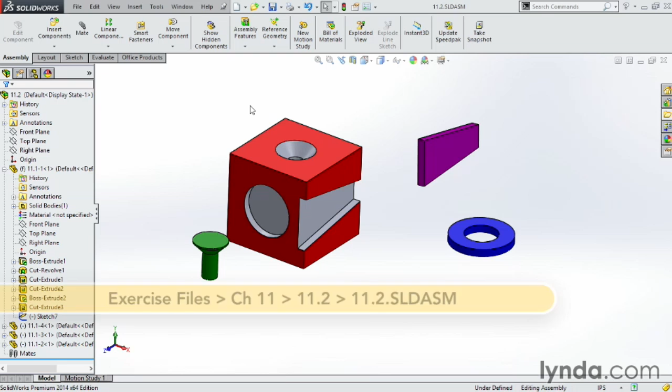In this video, we're going to cover the steps required to assemble parts together. The first step is to make sure we have all the required parts in the assembly. You don't need to bring all the parts in at once, however, sometimes it is handy to have them all available. Secondly, aligning the parts close to their desired location will help connect the parts later when we start getting into mates.

At first, let's take a look at all these components here and make sure we have everything we need. If you don't have all the components in the assembly at this point in time, you can always go back and add them in.

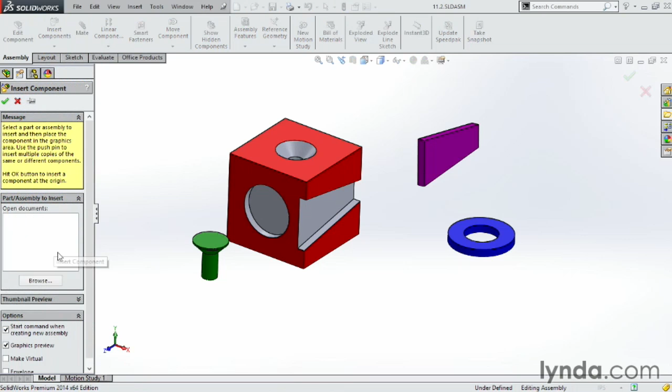You can come up here to Insert Component, and you can say Insert Component here, and any available parts that happen to be open in your file system will be listed here, or you can go ahead and click on Browse and import any other files you might want to have in the design.

In this case here, I'll click on the first part, click Open. You can see here it is attached to my tooltip. If I wanted to place another one of these same parts in the assembly, you can have as many of the same existing part in your assembly as you'd like.

When you're happy with that, click OK, and it's just going to place it in the assembly. It's a quick way to add new components.

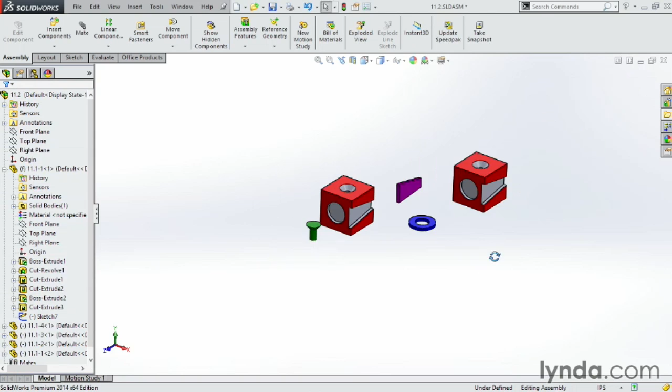Then what I'd like to do is line everything up so that I can easily see how to put these components together. So in this case here, I'm going to drag this over to here, but notice I'm dragging it kind of in 3D. So if I spin it around in 3D, you can see it's actually quite a bit higher.

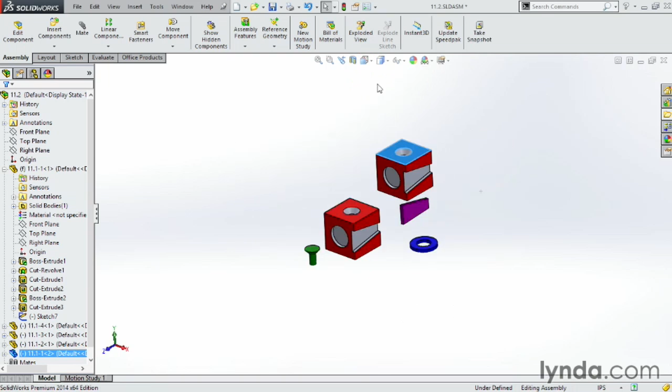Sometimes it's handy to actually look at this in a different view mode. You might want to look at the top of the parts and maybe align them like this first, and then maybe switch over to a different type of view that looks at the side and brings these down. This quickly allows you to move things around in the correct orientation.

Next, you can see I have this component here, and I like to have that kind of close to this slot over here. So let's put it over here. And this little green pin looking thing, let's put that up above.

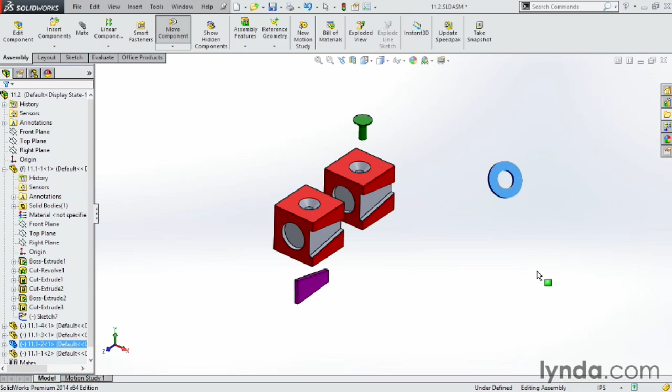And we have this little washer here. Let's spin that around holding down the middle mouse button to get it kind of close to the right orientation. It doesn't have to be perfect.

And then I'm going to bring that around, and I'm going to place that close to the end of where this other pin is. Now we've got things that are fairly close, but again, might want to move these around a couple times to get them a little bit closer.

That's the key to getting and building assemblies correctly the first time: getting the components in there, knowing what they are, what they're supposed to be doing, and how we want to mate them together.

Also, I want to point out you can also turn on and view sketches, planes, axes, or any of these other viewable items here through this list. You can turn those on so you can easily locate the parts.

For instance, if I turn on origins, you can see the origins of all the parts. If I go back and turn it off, you can hide that.

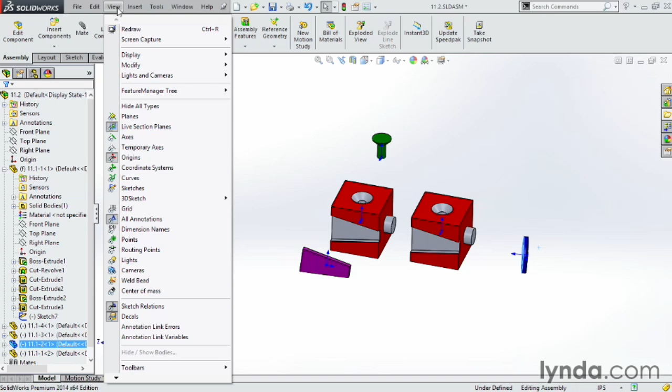You might also want to be using the planes to mate one component to the next. Notice each individual component over here, if you expand it out, has all the original planes you started with, plus whatever features you used to create the part.

So if I go over here and go to the front plane, I could say, hey, I'd like to show that plane. If you don't see it right away, more than likely up here at the top under View, it's not turned on. So make sure you're turning on planes, and then when I do turn it on under the View palette here, I'll be able to see it.

Again, if I go over here to maybe the right plane, turn that on, it'll automatically show. Same thing with a component like this. If I open that component up, I can click on the front plane, click on Show, and because these components are the same, it shows on both of them.

Those are the first steps in getting ready to build an assembly, and the next thing we're going to be doing is some mates. The steps laid out in this video will be repeated in every part in every assembly. Getting the parts laid out well will help you get your model assembled quickly and with fewer errors.